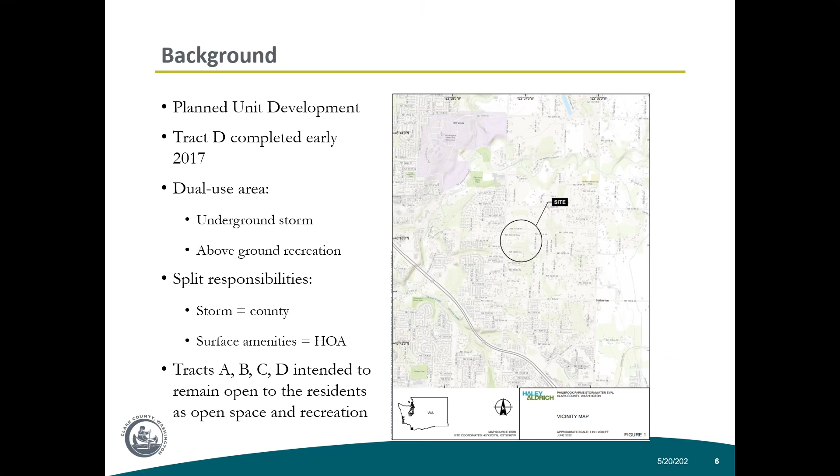That's the same situation for all four of the stormwater facilities in Philbrook. There's Tract A and B, which are on either side of the main drag coming in from 50th when you enter the subdivision. Tract C is over there close to 60th and 133rd or so. All four of those are intended to remain open to the residents as open space and recreational areas.

Secondly, I want to talk a little more about that stormwater design, because it's easy to see the recreational amenities when you go down to Tract D, but you don't see much of the stormwater design. This shot shows an overlay of the stormwater infrastructure in and around Tract D, and you can see the layout with the recreational stuff in the photo.

If you notice all the bright green lines running down the streets—and you might see my cursor moving, I'll trace a little bit—we have stormwater pipes out in the street. They're gathering water from all of the streets, roofs, and driveways for a good portion of Philbrook Farms, several blocks up there. That water runs down and is collected in these green pipes down to the bottom end of the subdivision, and then heads west.

When it gets to this point here, it crosses over and goes into the Tract D stormwater facility. This piece right here, at the very south end, is a treatment vault. Within that vault are 70 large filters. All of the water that comes off the roads goes through those filters and is treated to state standards, then moved down into the facility, to the part that's the infiltration basin, in the middle here.

Water comes into these two manholes, is spread apart, and flows into underground chambers—essentially 5-foot tall tunnels of pipe—that fill up with water. They're held there, and then the water dissipates and soaks into the ground below the facility.

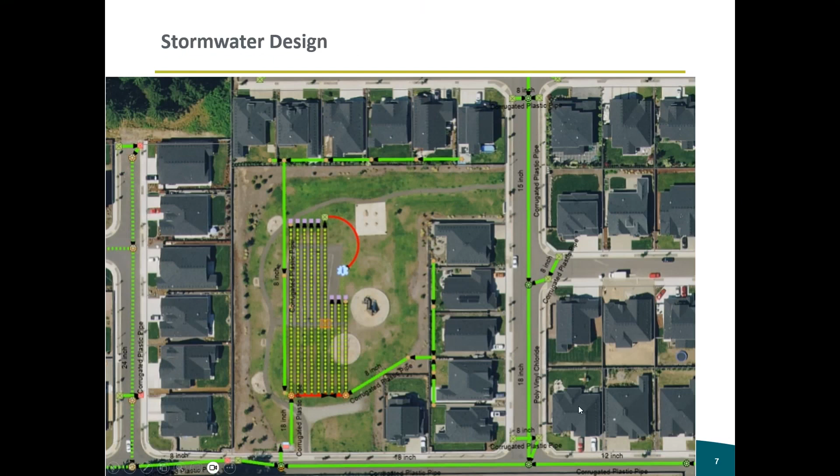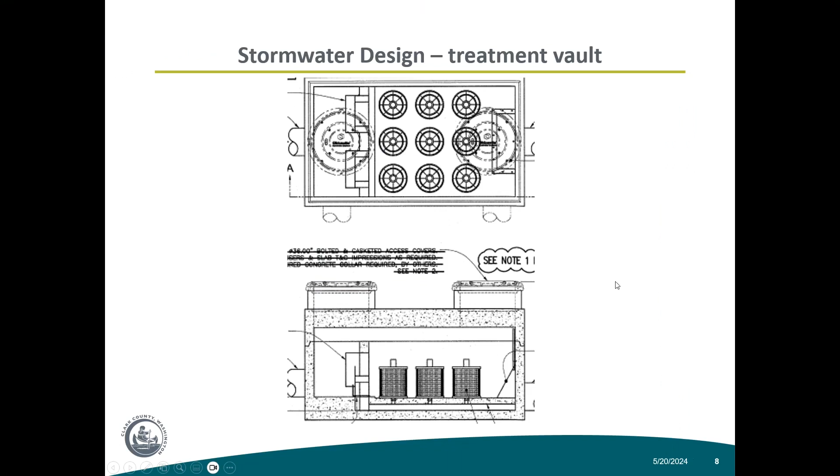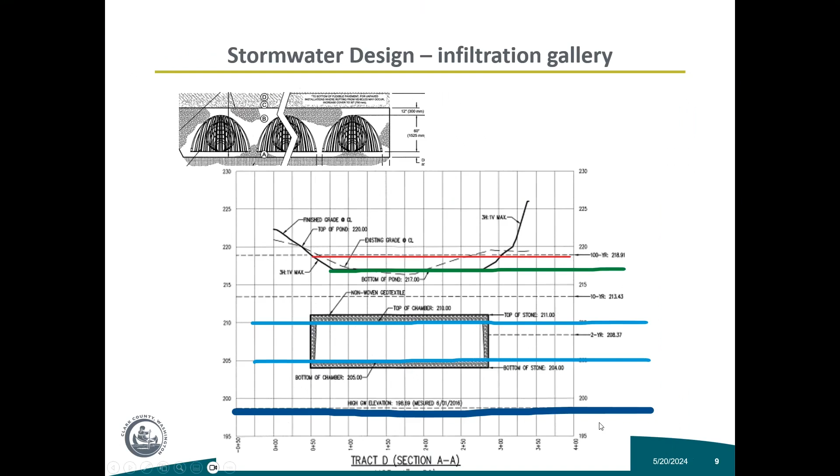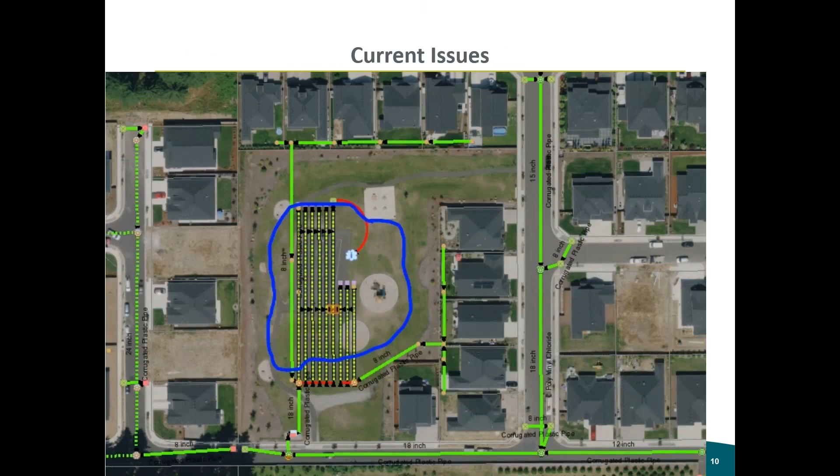As all of us are aware, that's not exactly what's happening. Our current issue is that instead of just seeing the water come up on the surface in a 100-year event, or at least an event bigger than a 10-year event, we're seeing water on the surface multiple times per year.

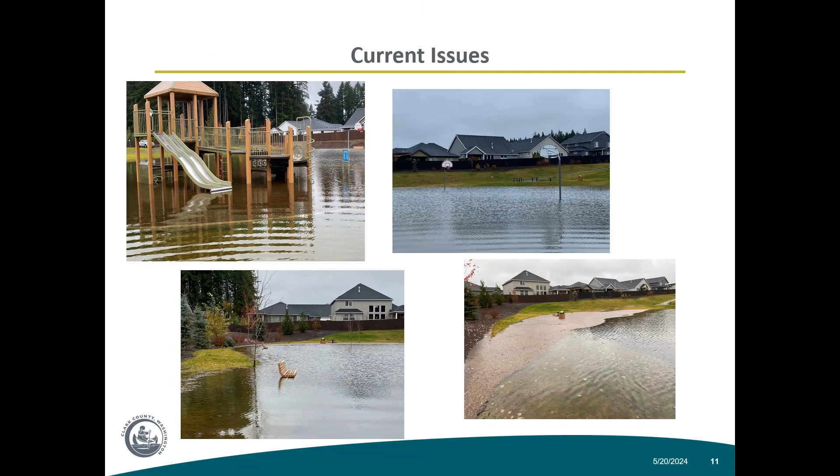Okay, so that's a little background on the facility, how it works, what we're seeing. So what's happened to date?

So the HOA board, your HOA board, approached Clark County formally, or more formally, in June 2021 with safety concerns as well as recreational concerns. The safety concerns, of course, are of paramount importance, but related to the winter flooding of the playground and the basketball court.

So it's essentially what we call an attractive nuisance out there. We've got those swings and playground equipment that are inundated at times. And there was some legitimate concern, of course, that we don't want youngsters to get out there and get themselves in any kind of harm's way.

So Public Works Management, our risk department, our prosecuting attorney's office, we met a few times and determined that the way to go would be that we need to fence that facility off during the winter, just to protect against that liability and make sure folks are safe. So in the intervening time, that's the way we've been operating the facility.

We've also done a fair amount of monitoring out there to try to get a handle on why it's happening and what might need to be done to fix it. We didn't want to jump the gun and try to do things that weren't going to work. We also had really no idea — we were hoping that it would be something that could be fixed with maintenance, those kinds of things. But in order to know that, you got to go in and do some upfront monitoring.

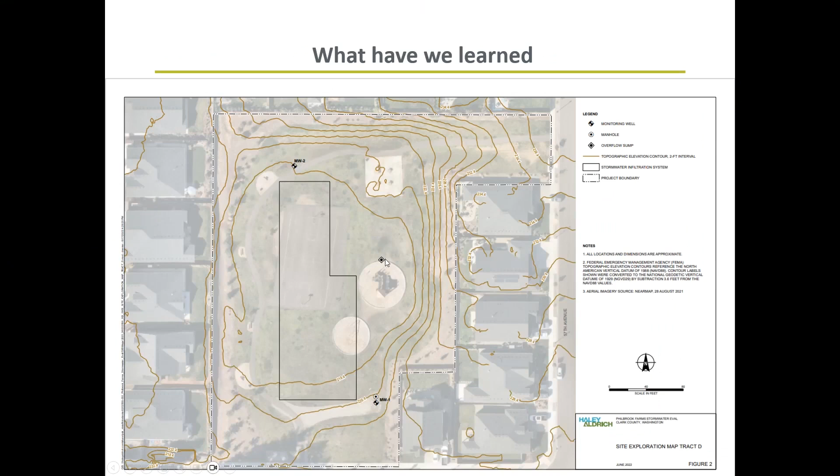Okay, so I want to give you a little bit of background on what we've learned. This is just a quick map from our consultant showing where our monitoring wells were. There's one up to the north end, one down kind of on the southeast end, and then this little diamond in the center is where the overflow is, where the water comes back up out of the ground and out of the system when it does overflow to the surface.

What we found is that the facility is actually compliant with the Clark County Stormwater Manual and state regulations. So as we looked at it, the water there is fully treated. I know I've heard some concerns in the past that perhaps we had contaminated water over the ground there — that is not the case, thankfully. So we have fully treated water, and the water is fully infiltrating into the ground. There's no off-site discharge, meaning that we are complying with the letter of the law as far as the state is concerned with the facility, which takes a little pressure off us as far as what we want to do.

Secondly, the infiltration gallery does not appear to be clogged or in need of maintenance. We've been able to get eyes on that and determine there's really no evidence that it's broken down there, or that it's full of sediment or silt or anything like that.

It does have some special rows in there, isolator rows, meant to get rid of any particulates that might have made it through the treatment system. But typically the treatment system removes all of those particles that would clog the system. So what we think is happening is groundwater mounding, which occurs when a lot of water infiltrates into the ground very quickly, and there's not enough time for the underlying groundwater to move out of the way and make room for the new water. That's what we're really seeing happening in this system. It builds up and plugs up the bottom of the vaults, or the infiltration site, so it won't allow the rain or water in, and we see it backing up onto the surface.

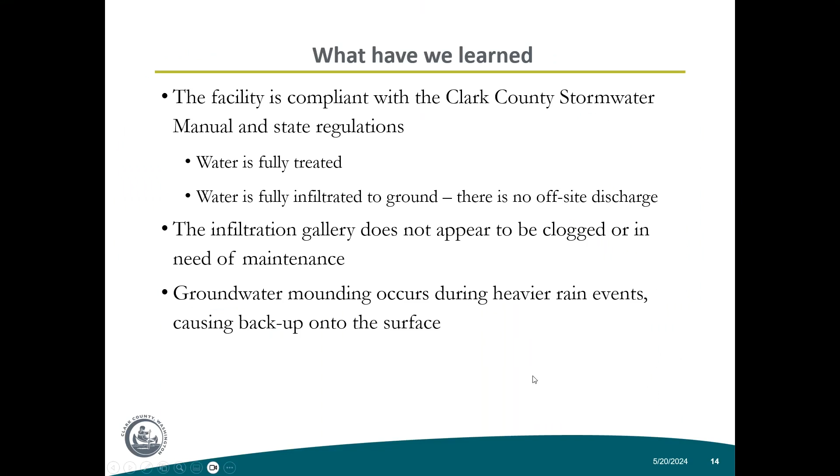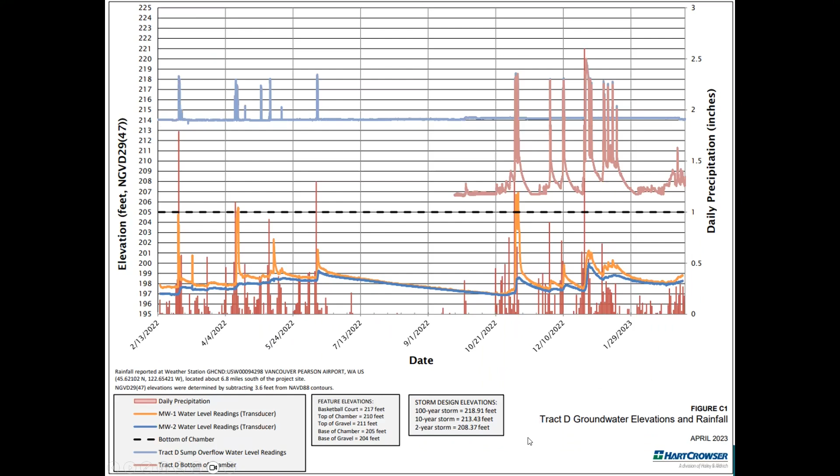So what are the take-homes from that? Groundwater levels are generally stable out there, and they're at the expected depth we thought we'd find them, based on what the developer found before they built the development and what we had hoped to see based on the plan sets. So groundwater looks to be where it needs to be.

That mounding is significant, and it's probably even more pronounced than what we see through our data, because the data was collected off to the side of the facility. So right below the facility, where the water is really going in, we think that water was probably quite a bit higher even than what we measured.

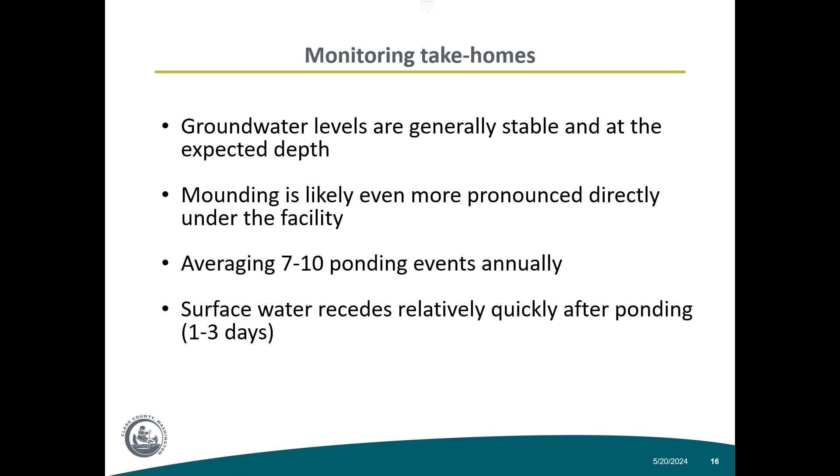As I mentioned, we average about 7 to 10 ponding events every year. One good thing is the surface water recedes relatively quickly after most of those events, usually 1 to 3 days, as you could kind of see in that graph, and we can go back and look at that in more detail.

Okay, near-term plan. We want to increase public access back to the property. It's been 3 winters that we've been doing this seasonal fencing. It's a bummer of a situation, and we'd really like to move away from that. We're currently excluding access on the order of 200 days per year. There's really only ponding out there maybe 20 or 30 days a year. That's not insignificant, but it's a lot less than 200.

So what we'd like to do by this fall is install a permanent fencing solution, but provide controlled access with auto-closing person gates at both ends. This would allow us to change the way we manage the site, allowing year-round access for users at their discretion. It would be code key access or a card, probably a code key.

The main benefit here is, of course, maintaining protection against young children gaining access. We don't want youngsters out there unattended or without someone knowing about it. We will also make this ADA compliant, adding a bit of paving to make sure we can situate those gates at a location where folks can bring strollers, wheelchairs, or whatever, so you don't have to go across the grass to get to the path.

We think that'll be $50,000 to $75,000 to get done. I'm hoping closer to 50, and we intend to be able to do that by November of 2024. So with any luck, we've seen the last of having the facility closed through the winter.

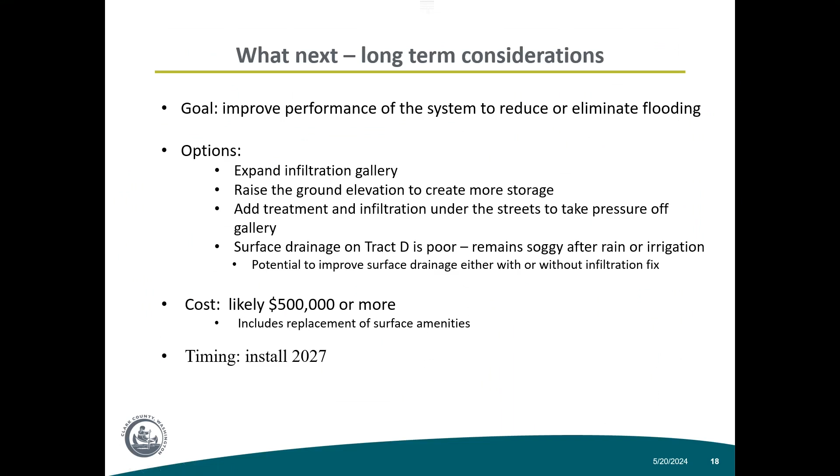Okay, last slide — what do we need from you going forward? We really want your feedback on the long-term options, particularly how important are those things to you. Is this super high priority, or is it okay if we can at least get in during the year? We'd like to hear what you think about the management of the site going forward.

Also, realize that those long-term fixes are quite expensive. Because we are in compliance with our stormwater permit, those fixes are dependent on county council approval. So we'll be taking those requests and needs up to our council to make sure we have a budget allocated. It's really helpful if we know what you're looking for and how important it is, so we can take those messages upstairs as well.

I think I will stop there. I didn't make 20 minutes, but it was pretty close. All right, I'll turn it over to Haley to set us up for questions.